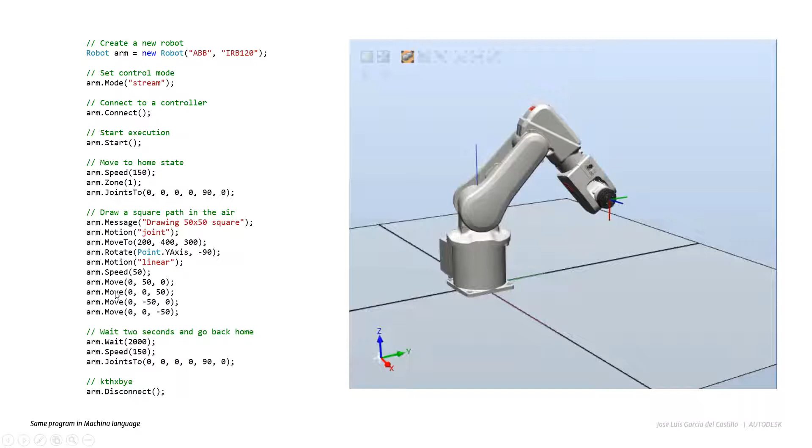But one of the motivations behind Machina is something that looks so complicated and so unintelligible for humans as this code is. Written in Machina, it would look something like this. Whereas, even if you have never used robots or written any robot code, even reading through this program, it's a bit more intuitive and a bit more clear than it would be to try to decipher what the previous Rapid program that we saw is.

So some of the features of Machina is that, for example, most of the actions that you can tell the robot what to do, they have an absolute form, which is this one. So move to a certain point, or rotate to a certain orientation, or set the speed to a certain value, right? Whereas they also do have a relative version, which is wherever you were before, move so much distance in the x direction, or wherever you were before, rotate 90 degrees around the axis, and however fast you were going, increase or decrease that value by a particular number.

So absolute actions have an effect that doesn't depend on where the robot was before, because they set a completely new value to that parameter, whereas relative actions depend on the previous state of where the robot was. Depending on what you're setting yourself to do, very often absolute actions will be very useful, but also, especially for real-time and for interactive interaction, relative actions are very handy.

So for example, if you're setting yourself to create some form of 3D printing, then you probably generate your toolpaths in some visual programming language or CAD software, and for that you have the coordinates of all the points, so absolute motion is probably more convenient for you. Whereas if what you want to do is to move the robot around in real time, so for example, just move it a little bit to the left or the right, more in like an interactive way, then probably relative actions are going to be much more handy in this case.

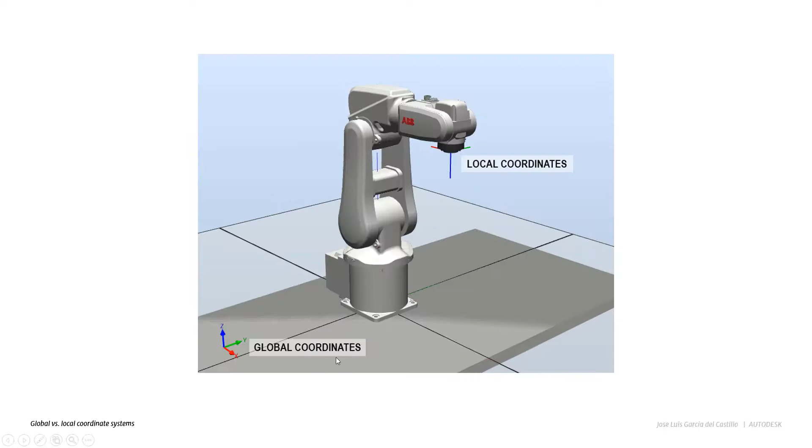Another interesting feature of Machina is that it can work in multiple coordinate systems, so you can relate all the actions to the world coordinate system, which is usually at the base of a robot, or to the local coordinate system of the tip of the robot, very often referred to as the TCP, the tool center point, right? And any other arbitrary plane that you can define as well.

But more than that, one of the main strengths of Machina is that it's not only useful for generating offline programs, meaning just creating, designing a program and a set of actions, and then compiling and exporting whichever native code for that particular platform would be, but to work in real-time mode, meaning have a live connection between the computer, the controller, and the physical robot device, and stream actions in real time as they start happening.

So one of the interesting things is that because Machina is a unified language, anything written in Machina can be compiled to, for example, this is ABB, this is RAPID code for ABB robots. This would be URScript for Universal Robots. This would be KRL for KUKA robots, and it can even be exported to a human-readable version of that program, which you can read line by line very easily.

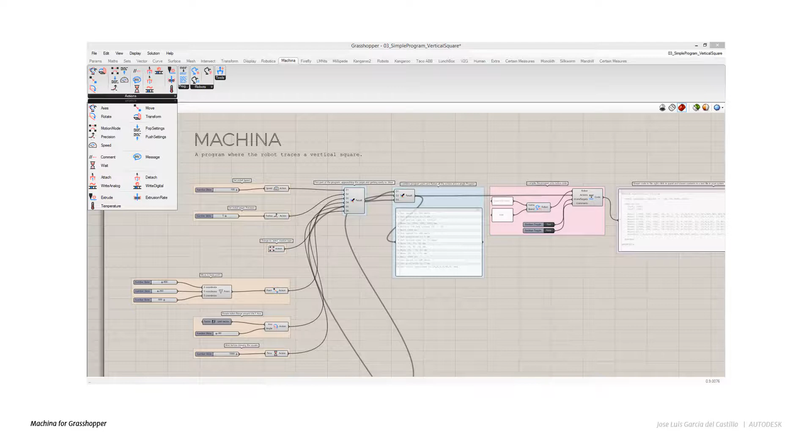There are tools that help with this offline creation of programs. So for example, there's a Machina for Dynamo, the visual programming language for Revit. There's also a Machina for Grasshopper, the visual programming language for Rhino, and both are very handy for creating programs that are composed of sets of actions and then being able to compile them to whichever native language, like RAPID code, URScript, you name it.

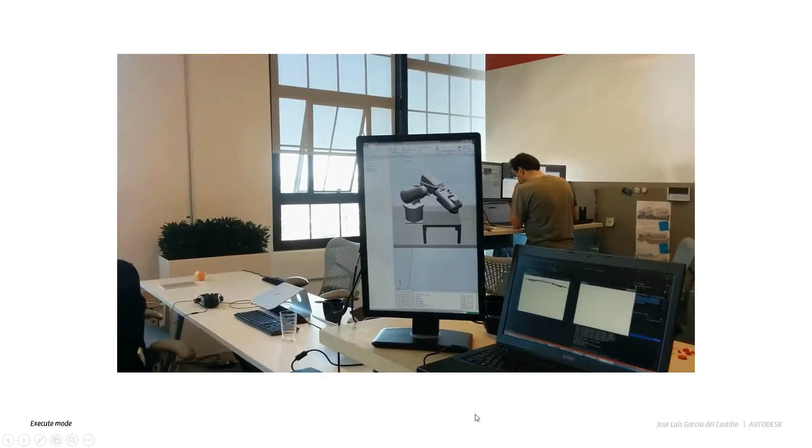But more than that, there is also the real-time part. So for example, in this example that we're watching, I have a table that is responsive to certain trackers. So I can create a stroke on the table, and then I can stream that stroke to the robot, and the robot can follow that path, therefore creating a sort of virtual drawing table.

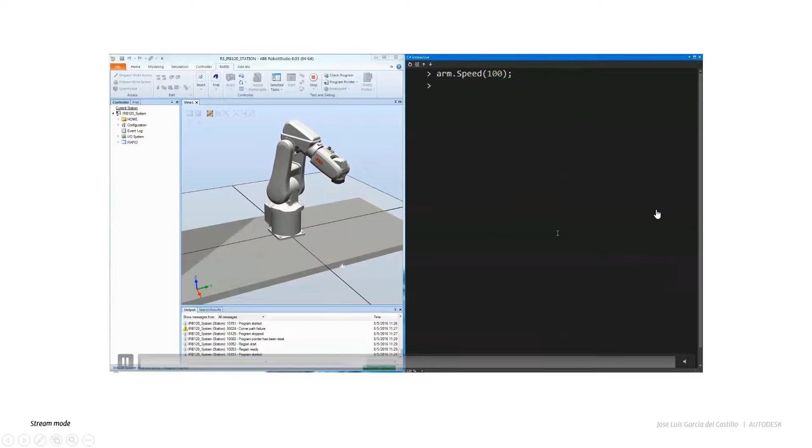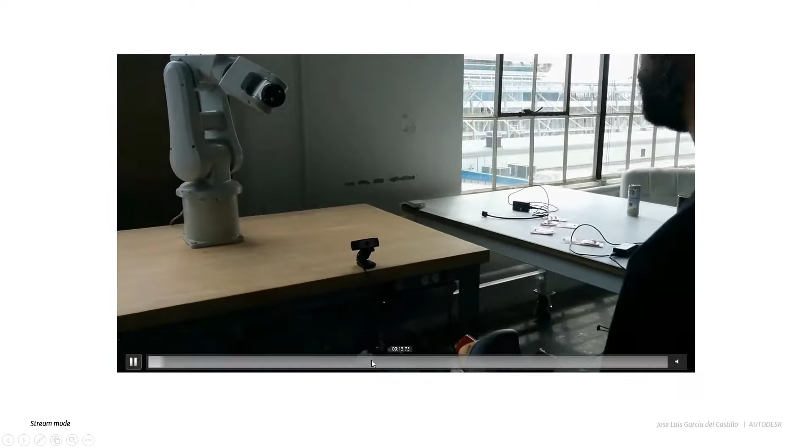I can also work interactively. So what we're seeing here is a C# REPL, a kind of terminal that has Machina loaded in the back end. And what we can see is that I'm typing instructions in the terminal, and in real time those instructions are being streamed to the robot, and the robot is following them and then waiting for new instructions to come.

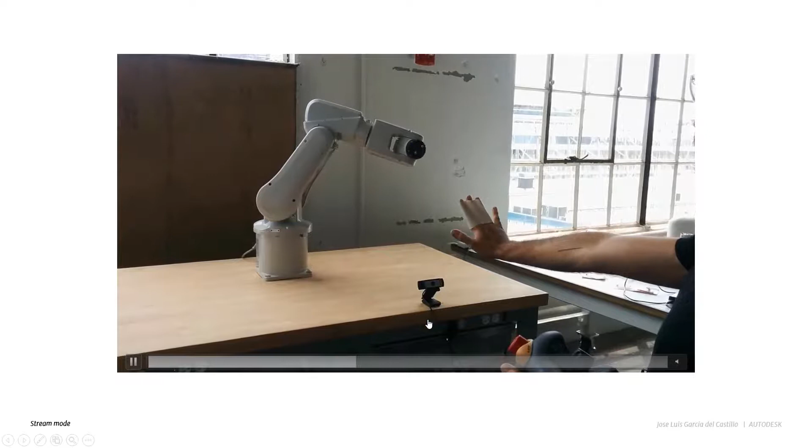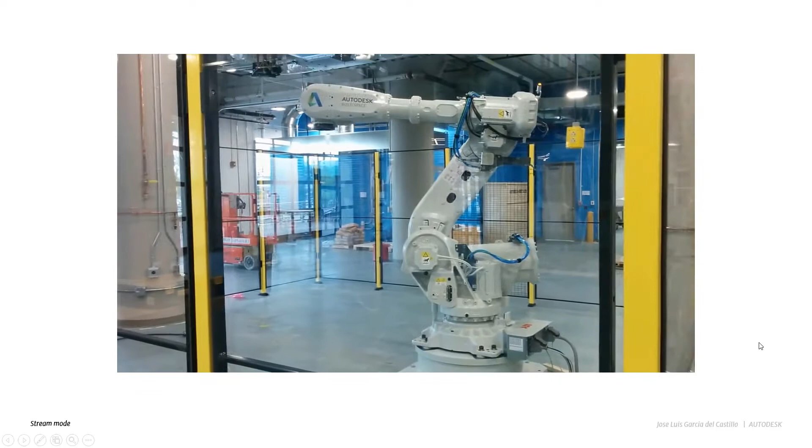With these kinds of tools, it becomes really easy to create interactive installations where, for example, in this one, there is a computer vision system that is tracking the motion of my hand and is making the robot follow that motion in real time. Or in this example, a commercial Xbox controller has been connected to a Machina framework running on C#, and that is controlling in real time the movement of this robot.

Furthermore, one of the interesting aspects of Machina is its architecture: the public API, the set of instructions that you can use, and all the internal classes and functions are all platform agnostic, which means they can be created without caring about what device you are compiling to or which robot you are connected to. But then by extending a particular subset of classes specific to the device you're targeting, all these actions and instructions can be compiled to a particular machine.

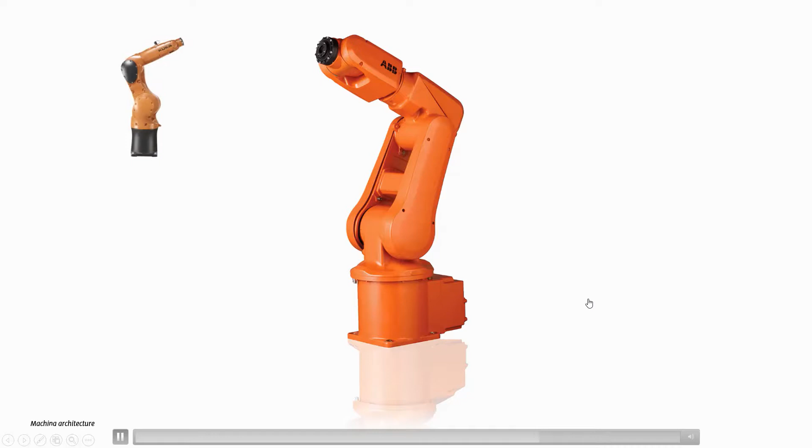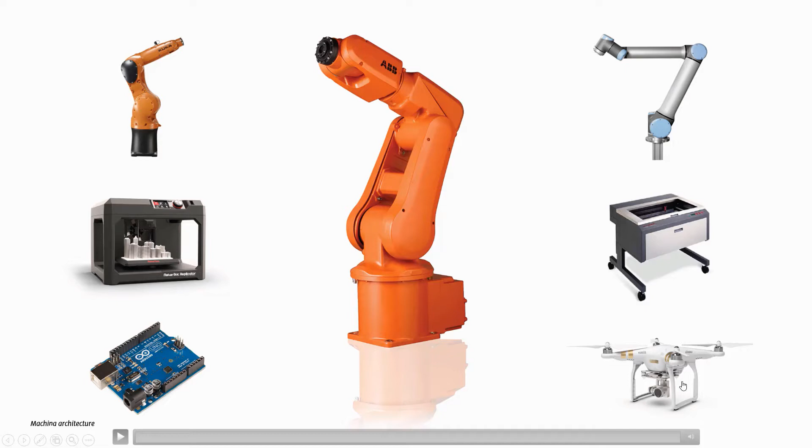So right now, Machina works for ABB robots and Universal Robots in real time as of the recording of this video, but it could be extended to any other machine that moves in 3D space, like KUKAs, 3D printers, laser cutters. It actually works for 3D printers too. Drones, you name it. So there's a lot of work in progress in this.